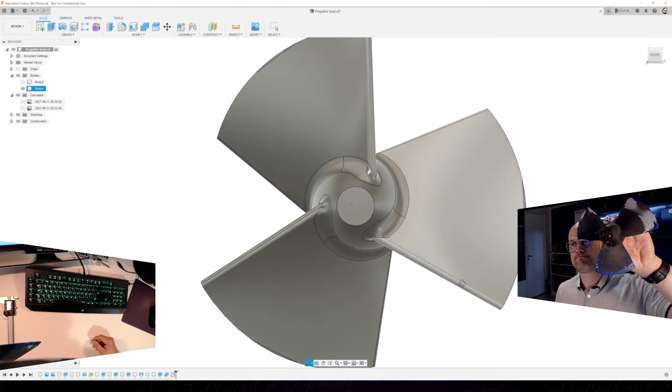I am going to show you something from this screenshot from last week's live stream. As you can see, the thing I was not very happy about is the fact that the fins went underneath each other, which they don't at all do on the original. So that was kind of a pain.

But since then, I actually tried to redo the loft function and made it look like this. Can we reach this one? Oh, if I did this. And now it actually looks like this. So now they have some room.

I don't know if it has any usable result when it gets into the water, but this is the piece as we left it last week. I would also like to be able to do these fin edges more sharp, because I think that would of course be better, that they would look like a real aeroplane blade.

But there's an issue with this. If we have to 3D print it, we have to make sure that there is actually enough material to make a layer that size. So to begin with, I'm trying to make it like this, where it has this rounded edge, and then we can always do some more tweaking and see if we can make the fins a bit more like real fins. But yeah, this is the propeller as it is right now.

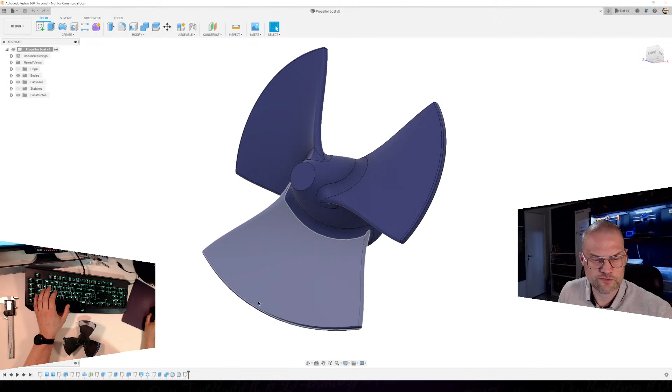I'm thinking we are going to go ahead and, well, we could try to have some fun with the loft function. It's actually not that bad of an idea to show you how it works. Remember, when you use Fusion, you can always go back to your timeline here in the bottom and find the function you wanna edit or completely remove. I only made one loft, so that's pretty easy.

This is the one. I'm gonna edit that, and it's gonna move the timeline back to where we were at that point. And we can do all kinds of crazy things with this fin. When we have finished doing stuff to this fin, we can just say OK, and it will reapply it to all three fins and do everything we told it to do afterwards. So we should be golden on that front.

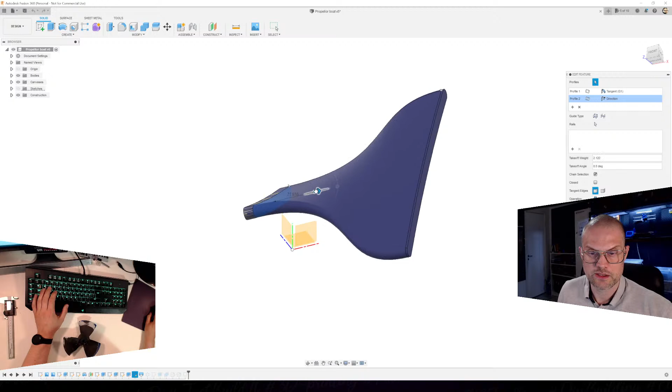There is two edges here I can move and do stuff with, and pull them in and out to my liking. This was actually the way I did the, the way I made it not go underneath each other.

Let's try just to say OK on this one, just for fun. Let's see if there's still room. And again, I don't know, I'm not an engineer, I don't know if it has any usable result either way, but I actually think this propeller looks pretty good.

So what I was thinking was that maybe we should try to just keep the fins here and go back and try to do the fins in a more, see if I can show you, a more, yeah, well, this is a real aeroplane kind of fin, but on both sides. And I'm not sure that it's gonna work like this, but we're gonna try this, that's for sure.

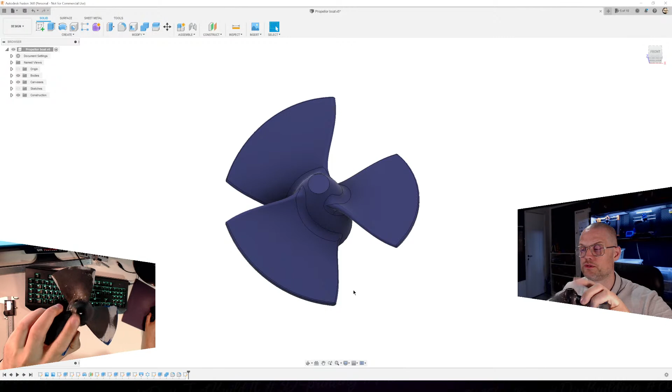Okay, so we need, obviously, I hope you can see this, we need a hole to secure it to the mounting rod, and we have our trusty calipers.

Just gonna see what size hole we need here. 12 millimeter, and there is a hole more in there in the bottom. Let's see if I can reach it, and it's about 6.

Okay, so first we are going to choose the face where we can do the drawing of the hole. I'm gonna make another sketch. I am going to press C for circle, and let's make this 12 millimeter.

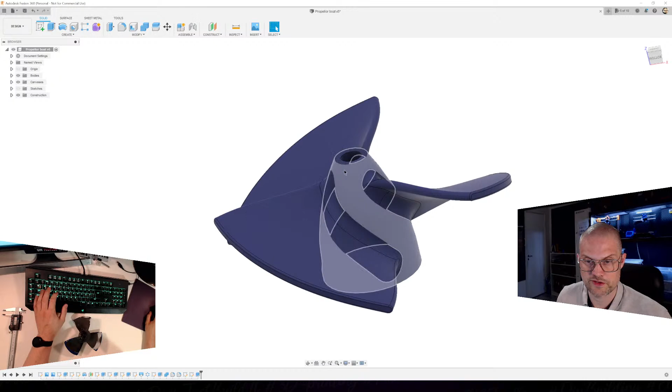Okay, I'm gonna highlight it, press E for extrude, and it's of course going to be going inside the propeller. Let's see, it's like this. It's also 12 millimeters inside, so minus 12. There you have it. We now have a new face down here we can draw on.

And of course we need again a hole, C for circle. The rod that we are mounting it on is 6 millimeters, and I know that when you 3D print you have to accommodate for some wiggle room. So I'm gonna make it 6.25.

That usually is enough. I'm going to again highlight the circle, E for extrude, and this time use not distance but to object, anchoring it to this bottom piece, so that if we make this piece longer, it will still make the whole way through.

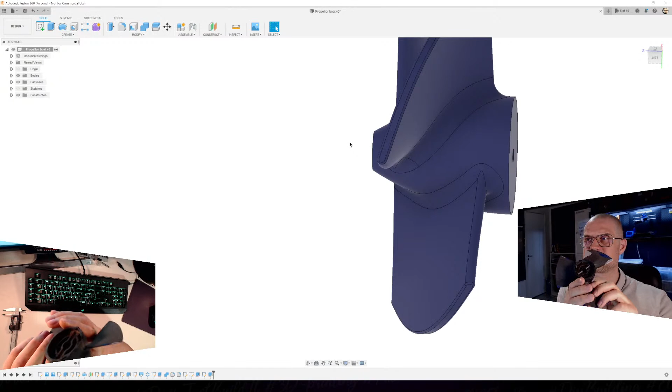Okay, so that was the first easy hole to make, and the propeller also has this. It has some weird kind of things inside it too, and this cross section, which I believe comes from what holds the propeller to the shaft, so that it will rotate and not just have the shaft rotate inside it.

So we are definitely needing to draw this piece right here in the middle. I am not a major fan of making all this in the middle - it saves plastic, but it's not always a good idea when you print stuff to not have a big fat surface to print on. So I think I'm gonna try to get around this by just making the cross section here and pulling it down enough so it will fit the same size as this.

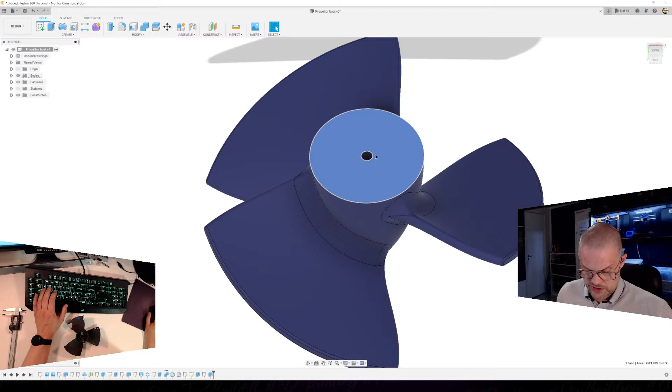So let's see, we can draw on this side again, and we need again to measure this piece right here - 48 millimeter.

Okay, now I need to make this a rectangle. I'll use my toolbox, S for toolbox, choose the center rectangle because I want it to go from the middle part right here. I know it's 48 millimeters wide, gonna make sure we can fit it, so we'll give it a little bit more. And the width is 5 millimeter. Okay, tab 5 millimeter, so this should be enough.

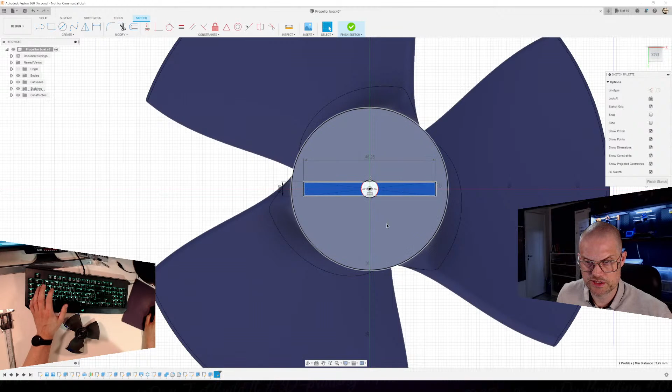So I'm gonna make sure that the hole is actually a lot bigger. I wonder if it has to be that all the way through. Perhaps we can make that - we can make that, I know we can. Let's just extrude these two pieces down to the size we need here.

Again, 12 millimeters, 12.4. E for extrude, minus 12.4, like that. We got this little thing made. And I realized, of course, that it's rounded in the bottom, but that's not a real issue because we can just make a fillet down in the bottom there.

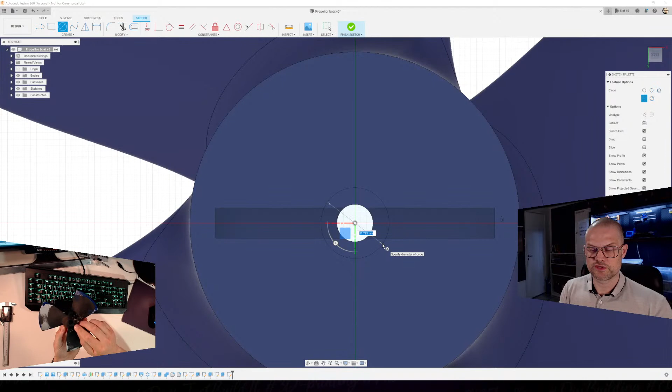But before I do that, I will actually like to make another sketch. I think I'm gonna make the hole here in the back bigger because it looks like it has the same size hole as it has in the front, and just kind of a spacing in the middle or some way down there. Let's see if it's 12 millimeter. It is. So we are going to make it 12.25. Let's do that. Okay.

We want, of course, to take everything here so we have the entire circle highlighted. E for extrude, and this is actually another fun part about this project - oh, sorry, this program. I am not absolutely sure how long there is to this part minus this spacing we need, but I can again do a to-object, go to this. It will of course remove everything.

Then I can go to offset and say - well, I'm not able to measure this piece right here with the caliper, but it looks like it's between 2 and 3 millimeters, closer to 2, I think. So my offset could be 2, and of course it's minus 2, and then we can say okay, and there we have it.

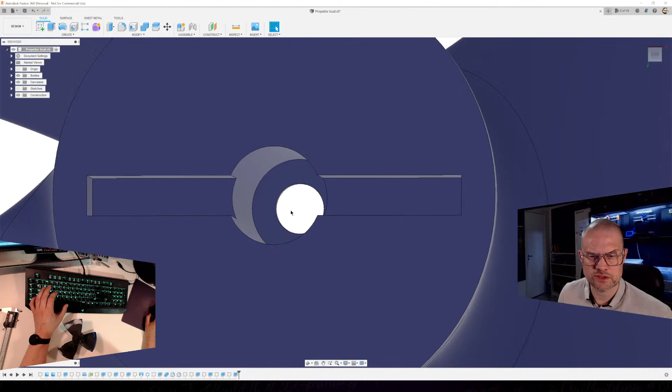Yeah, this is the way it's made. I haven't seen the rod we are going to mount this on. I don't think that originally this is not a good idea, but let's see.

Okay, I want to round these two pieces because they are rounded - I don't know if you can see that, but they are rounded here in the bottom. Let's see if I can get it to zoom in on this. I think I can. No. Work on some more lighting down here. But I am going to make it like if it was just rounded all the way. F for fillet, these two.

I remember that we made this rectangle 5 millimeters. That means that 2.5 should make it round exactly, which it also appears to be. Okay, there you go. We have a rounded piece right there.

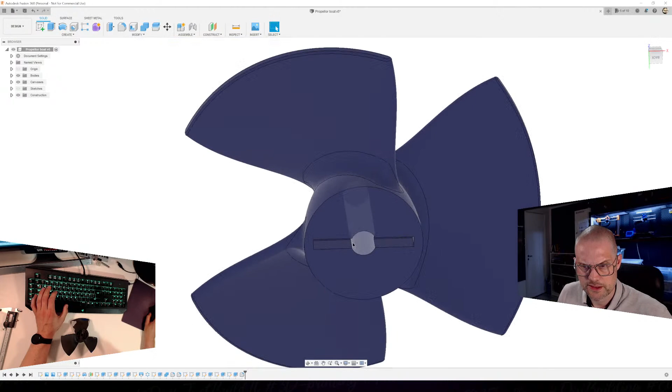Apart from the hole that goes in the side, the two sides of the propeller, that's actually pretty close to being finished with the first prototype of this bad boy. The holes are in the same direction as the cross section here, and I need to know where they are, and how to best draw this.

Of course, I'm not able to make a sketch on a rounded surface. That way I can't just go ahead and do sketch on this. I actually think, what would it do? It would just tell me to go ahead, pick a place to do it. You can't do it on a rounded surface, you know that. So let's just do like this.

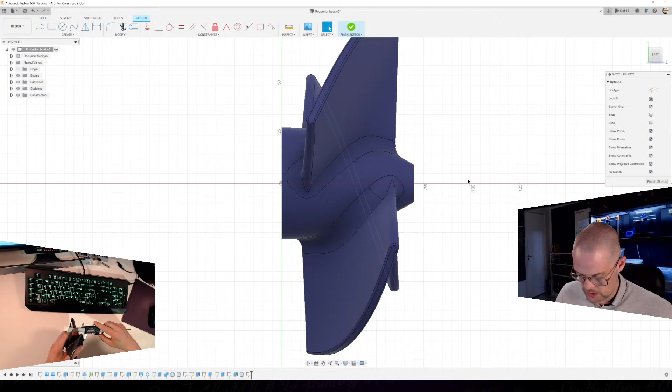Again, we do a little measuring. See if we can find the middle of this hole. 45.5. Oh, this also has a threading in there. Yeah, we're gonna make that with a tap later on.

Okay, let's remove the body to better be able to see. I'm gonna do a line, like a construction line. 45.5, like this, and a circle. I want this circle to be a real circle, not a construction line.

Let's again measure the hole. So this would appear to be a 4mm threaded hole. So if we want to thread this, we want to make sure that there is enough plastic to make a thread. So we are going to make it 3.75. It's my best guess.

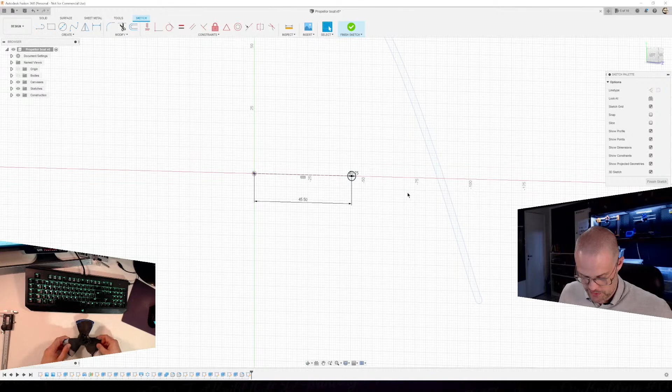The hole is going all the way through, which means that we can do another fun feature when we do an extrude of this. If I can get it, come on, yeah, there it is. Extrude, and I am just going to drag it out. Like that, going to drag it out like that.

Okay, but I want to go both ways, and if we look here, we can see that from the origin, the middle of the propeller, we have only gone one way out, and we are going to use, this time we will be using symmetric because it has to be symmetric.

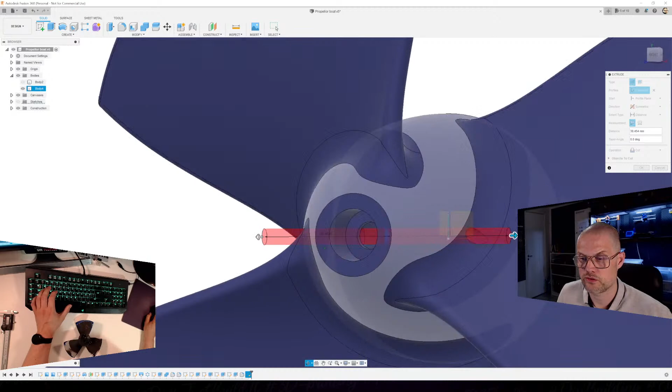Now we have just made another body, but we want to make this a tool to drill. So we're going to open this, and as you can see, everything goes red, which indicates that it's going to cut through the model itself. So let's just apply this. Okay, we have a hole in the middle there.

I wonder if I'm going to be having trouble with these holes later on. It shouldn't happen.

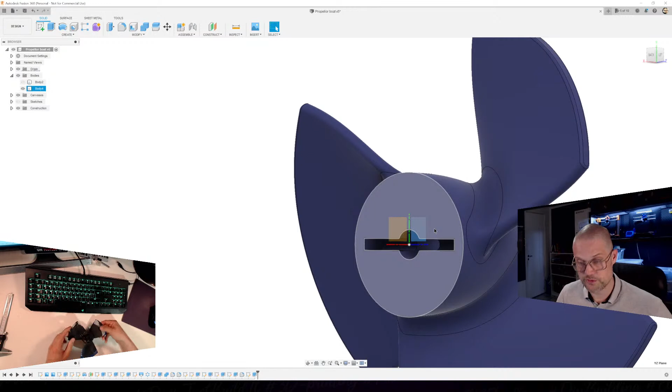We are going again to be making a sketch because they are kind of sunken down, to make the screws disappear in the holes, of course, and we need to insert them a bit. 4mm. Wow, the measurements really go again and again and again.

I am going to make a sketch on the middle part of the propeller again. This time I'm using Project. I'm going to choose this hole to get something to help me. Remove this, turn it left. And I didn't get the other way measurement. I'll make it 10mm. C for circle, which it doesn't allow me to do here. That's kind of odd.

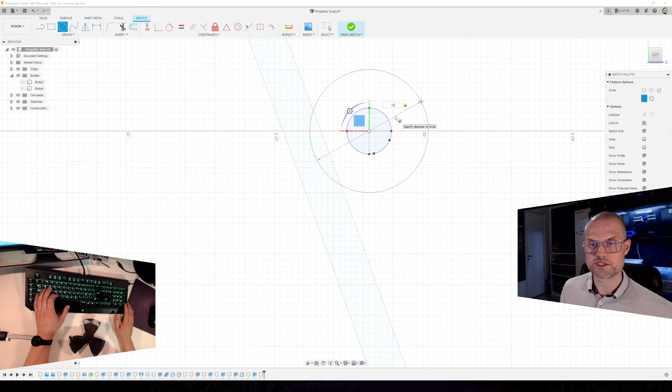Construction line. Construction. Oh, I was lucky there. 10mm like this. Okay.

But if I open my drawing and just take this out, I'm going to make the hole destroy the propeller. That's of course not the idea with this. So I am going to have it start not at profile plane but an offset, and again, I am going to guess this because I can't really get to figure out where this hole starts.

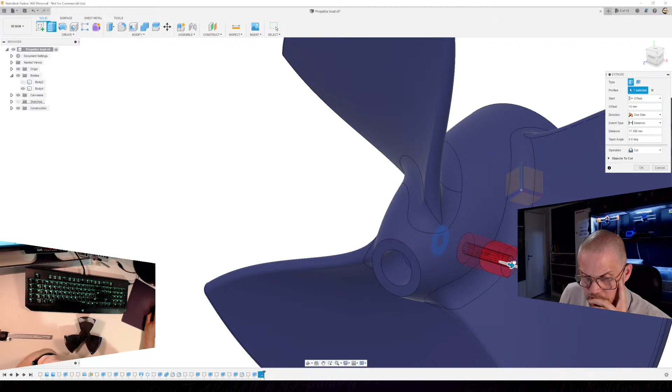So it's going to be a bit of a trial and error. Start by 10 mm. Yeah, 10. Okay, I'm definitely going to run into some troubles with the propeller, I think. Let's see if we can remove the propeller a bit.

We could perhaps do that. I guess the offset is, again, I'm going to choose symmetric because... I'm not going to use symmetric because apparently symmetric can't do the offset. And why can't it do that? That's weird. It has to do that 2 sides instead.

Okay, I'm going to make it all the way through, and okay. I'm not going to use 2 sides, I'm just going to use 1 side, and then I'm going to mirror the feature afterwards.

Really annoyed about this because there's really only one way to do this unless I start over with the fins. Let's see how bad it goes.

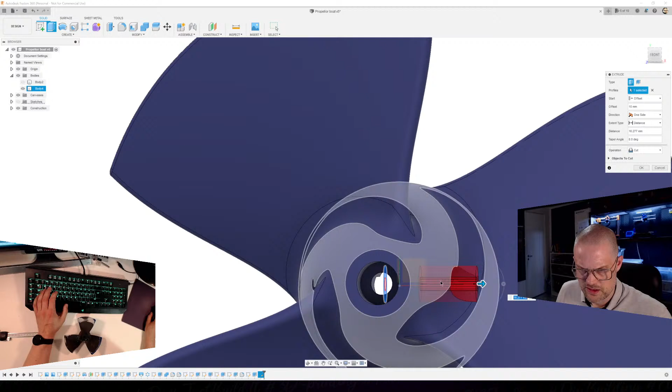Pull this one a bit. And the offset, 15 millimeter. Ooh, I think that's good. Okay, so we definitely got a hole there.

Now another fun feature, which I also use a lot to make things easier: mirror. Instead of mirroring a face, I'm going to mirror a feature. I just made a feature which was this extrude. I'm gonna highlight that, it asks me to select the plane. I'm going to select this plane, and hopefully it will do kind of the same thing here. It's not 100% certain because they don't look the same, but let's try and see what happens. Yeah, it worked, but it doesn't always work. This time it worked.

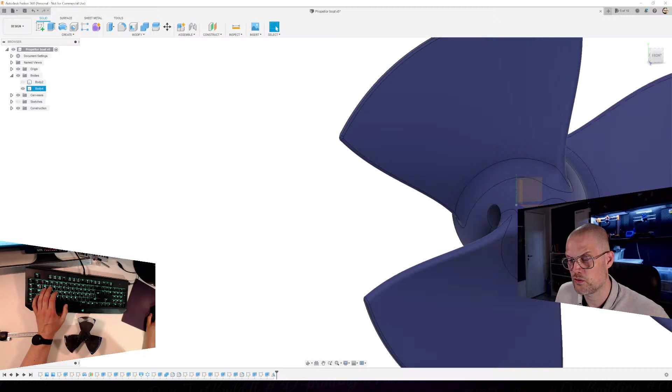Something tells me that I am able to make this crossbar sit in another direction if I need to, but I'm not sure that moving this that way and that hole the other way will make any help to us at all. So I'm gonna think about what I'm gonna do here, and how on earth did the fins get so different from the original, one could ask.

We are still running, yeah. It's gonna say I'm gonna run out of...

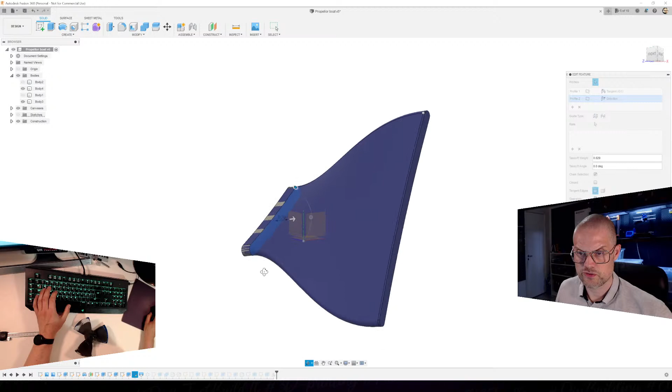Let's look at the loft one more time and see if we can do something funny with it. Need to remember that it is tangent and direction. But what if we do curvature? Oh, that was the one it didn't want. Make it. That looks like... okay, that's a crazy propeller.

And one of the holes in the last part we made actually went to, I'm not gonna say it, but that part of the hole doesn't work anymore, because now everything on this surface has changed. So yeah, let's move it back.

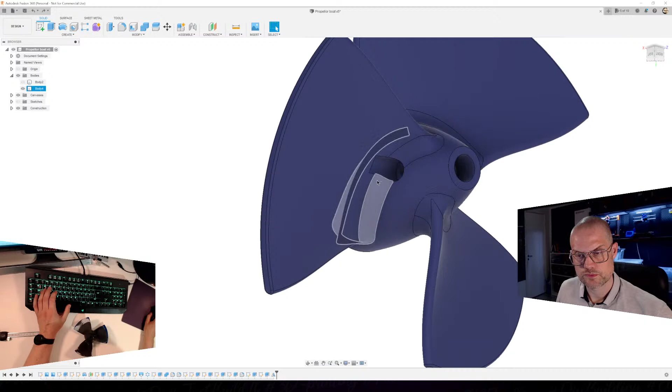I'm gonna regret to undo that, and if this even has any issues, but I guess the propeller has to be somewhat even weighted all over the place when it turns.

I am pretty sure that I need those holes no matter how I do this.

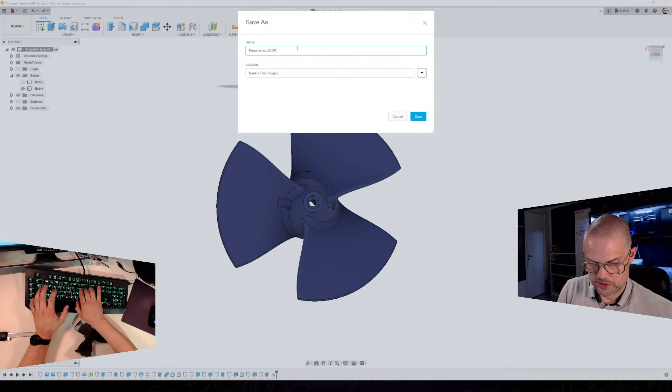Save this. I'm gonna make a copy of it. I'm trying to see if we can perhaps get a better... save as copy. Okay, now we hopefully have two of these, so we're not gonna destroy all the work we did. We have, okay.

I am going to actually go all the way back. Let's scroll through, scrolling back through the timeline to see what we did. Weird mouse today. And that's before we made fins and stuff like that.

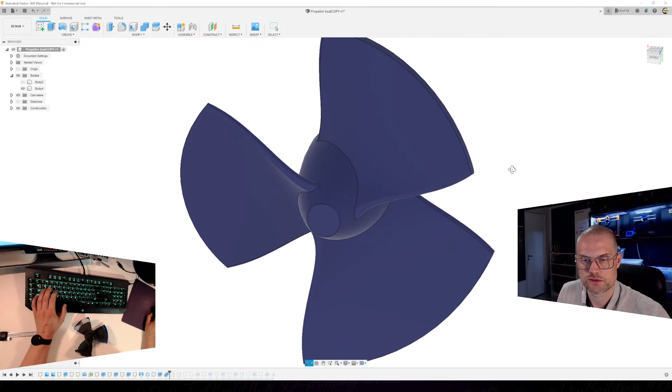Back to where I drew this, and reapply the canvas like this and see. Okay, this was the original canvas we were using to kind of draw up where we want our piece, our fin, to work from.

See if we can move this a bit. Oops. Why? Move it, let's turn it a bit like that.

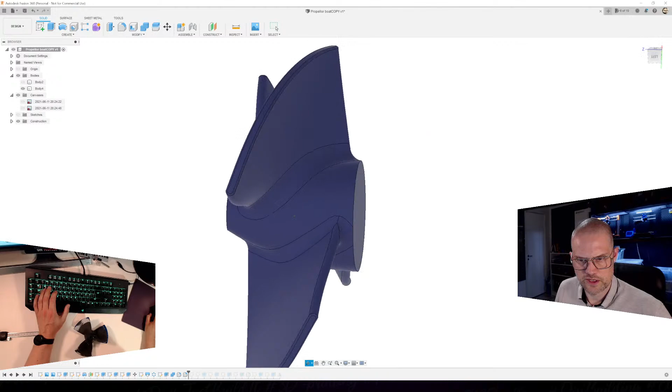And something happened, but well, something really good actually happened, because we just got ourselves some room to try to rotate.

I'm not entirely sure this will work, but let's try it for the fun of it. I want that marked out, I want that highlighted, and this, and this, and this, and everything that should be rotated.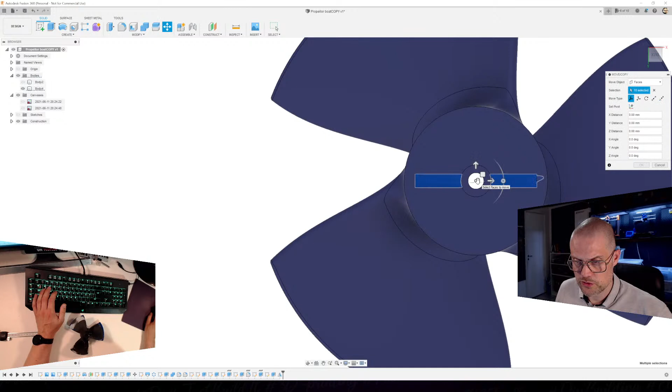M for move. I of course need to be sure that its origin is in the middle. And again, I'm not absolutely sure that this will work, but let's try.

Oh, it's not liking it at all. It wants to go the way I don't want it to go, which is kind of a pain. I am pretty sure if I do like this and like this, I can go ahead and do this thing. But can we then see what we want, where we want it to go? That's the problem, right?

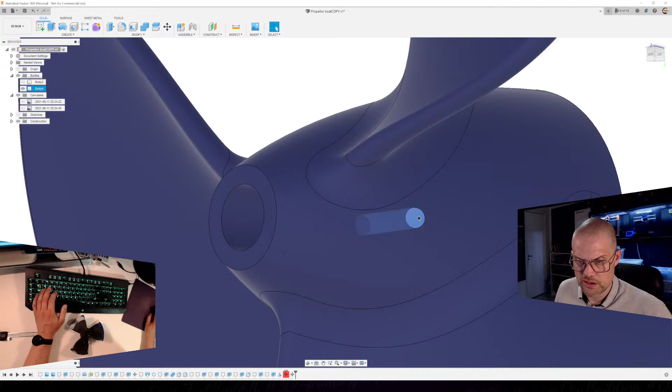See, we want to make sure that we don't interfere like that, perhaps. And now we can simply highlight the hole, press delete, another powerful feature. Delete, yes. And we will simply just align the hole with the new crossbar section here.

Let's see. If I use our original origin now, we will not be in the correct angle. If that's not a problem, just saying that sometimes you need to think about these things.

I'm going into my construction menu and I'm going to find something called a midplane. You will be using this a lot. I'm going to make me a plane to draw on in the middle, but perpendicular to the new crossbar section.

And we are then, to highlight the new plane we made, I'm gonna do a sketch on it, and we need to make the holes again, but this time I think we are going to be better off not interfering with the fins.

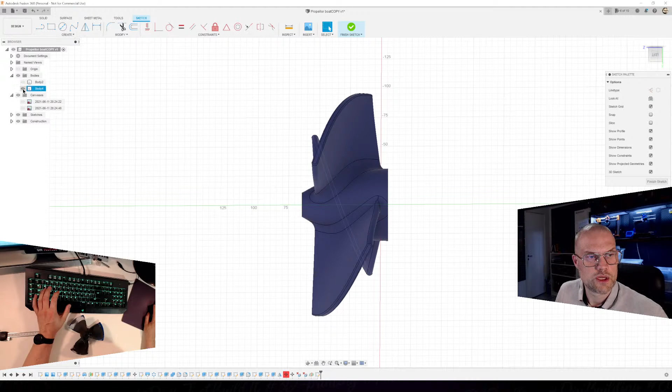So let's try to turn off the body, make a line, construction line from - no, that's not the bottom of the piece, is it? No, it's not. I'm going to do a project of the bottom of this right here. Yeah, oh yeah, that's finish sketch, because I need to reapply the sketch, edit sketch, so that it is perpendicular to me.

And body off, construction line, farthest away. And if I remember correctly, it was 45.5. Yes, it was.

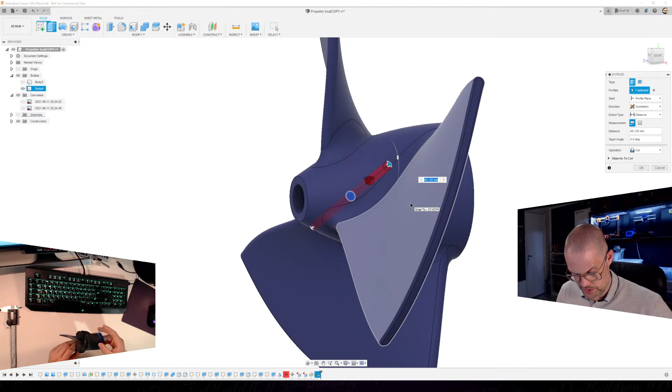It's still not ideal, but it's not ideal on this either, I think. Oh, it's kind of the same now. Let's keep it like this. Okay, now I have something down here it doesn't like. Compute failed. Okay, what if I delete it? Nothing bad comes from that, right? Nope, it's okay.

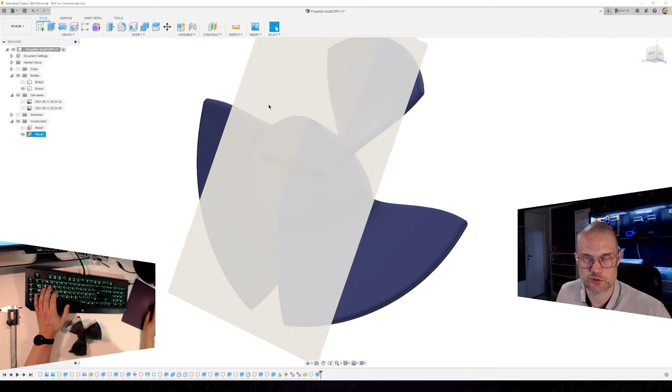I just made a plane that way in the right orientation, which makes it unnecessary to make another one, because on big designs you can have like hundreds of these planes, and then when you have to use one of them, you are going to scroll down and down, unless you are one of the crazy people who always rename your planes as soon as they are made. I'm sure someone does that, not me.

Okay, let's draw a sketch. We already have something we could use as a projection. The holes we are going to make bigger, like this. And since I don't have the right angle, and it's not like I can do like this, because we have kind of made that option not very friendly for us anymore, we are going to say finish sketch, and as soon as we've done that, we are going to edit the sketch, which will then center it for us. Again, we have a circle tool, which again, of course, doesn't want to work here, I think.

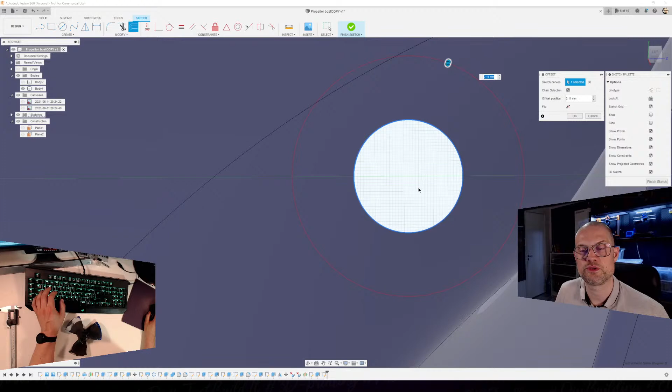Nope. I could use the offset tool, but to be honest, it's too late for me to start doing math about how much more I need to do. So I'm gonna try to see if I can make another one. It has to be somewhere in the middle. Well, it doesn't want to do that. It's really weird.

See if we can do it like this. This is pure luck if this helps. It's close enough. 10mm, as I recall, yeah, 10, 5.

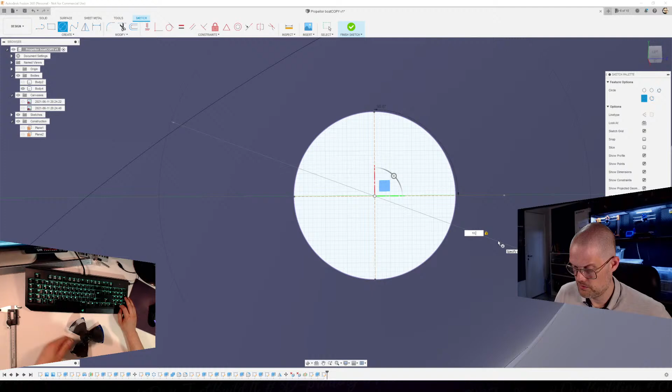We have made this circle inside this part right here. And again, we want it to have an offset before it starts, so it doesn't destroy the inner part of the fins. Like this. E for an extrude.

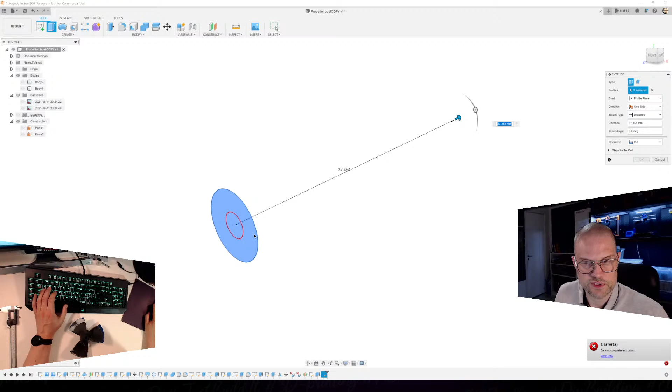And we want it to go all the way. Cannot complete extrusion. Why? Something about that red part in the middle, I think. Does this sometimes. Delete that part. Extrude this one. Much better. Much better. Okay.

Well, obviously we don't want that big of a hole all the way through. Again, we are going to do some very good guessing. Offset, let's just call it 15, I believe was correct before. Still looks good. Yeah, it's not so bad.

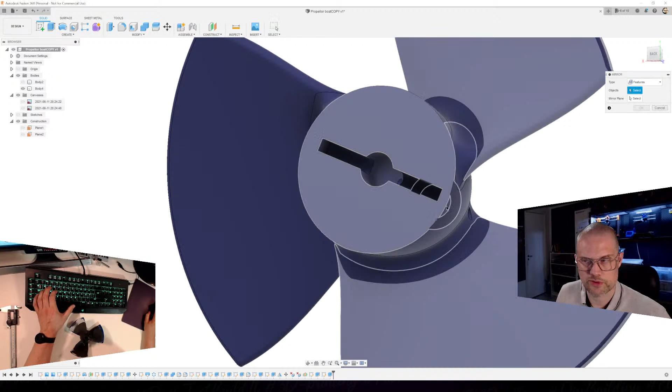Now we should be able to do the mirror feature function. So let's try to do that. Mirror feature, the last known extrusion we made, and we want to do it on our plane from before, of course, this one. And it kind of does a bit of an outline there. I'm not entirely sure it's going to work, but well, there you have it. It worked.

And let's just see if we can do something about this. This doesn't have to be a problem.

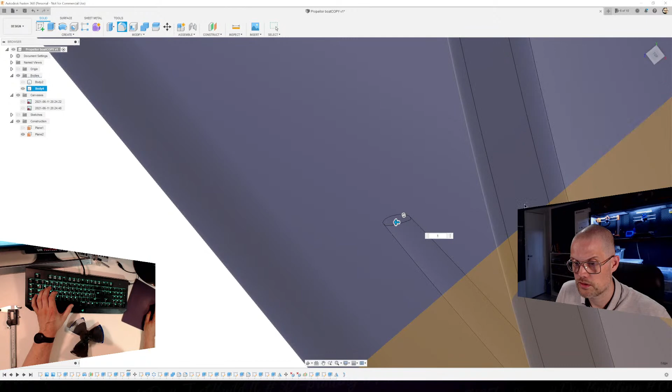Now, do some more fillets there. Fillet. Go, go, go, go. Yeah. Okay. That. And really want to make one on this one also.

I can hear my graphic card roaring up. There was a problem, don't say. If you run into problems with fillets, sometimes just trying a smaller number will help you a lot. Usually it's not a lot smaller you need to do it. 1.5 would be also, yes.

And we want a fillet in here to make it stronger. Now this part right here is the part where you go through your model, and if you try to design something and 3D print it, you will eventually learn where you have to make your model stronger. And a fillet from time to time, or a lot of times, works immensely good on that.

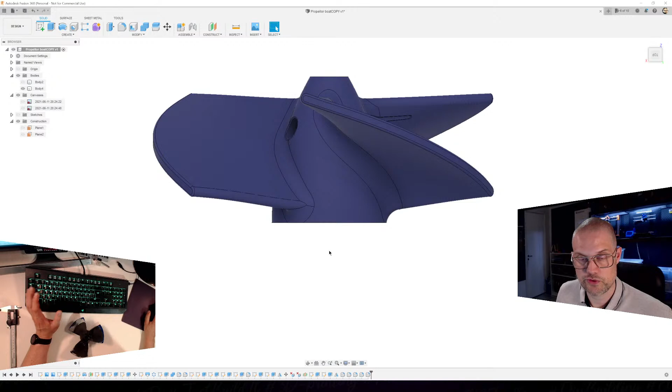Okay, I have one thing to tell you about this piece right here. If I am going to print this like this, I would be best off printing it from this side against the bed, and I could of course just rely on my slicer to do the support material for these fins.

But I think that I would be perhaps better off if I did some kind of cool break-off support right here in the sketch, in the drawing. I'm gonna try to do that. Just gonna make sure that we have everything important on the model. Yeah, it would seem so. So

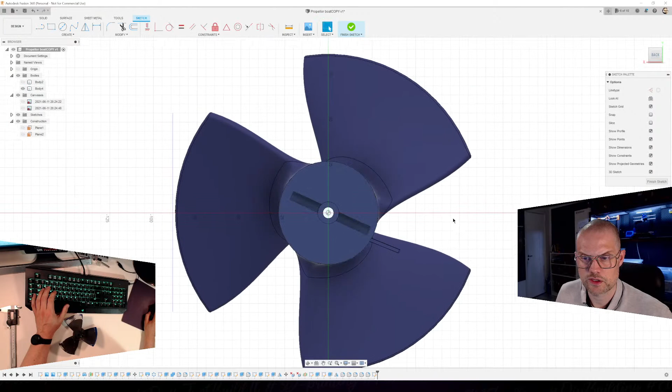Take from this side. Now I am not able to project. Yeah, I am. Okay, that's weird. This one. Yeah. This one. Wow. Okay. Now I actually have something to help us. Okay.

And we need to make an offset of this. 4 millimeters, I guess, and the other way, -4mm. Let's do that with just the one, and right, I'm just gonna make one. I'm gonna use this amazing tool called, yeah, what is it called? Pattern, of course, right? Circular pattern.

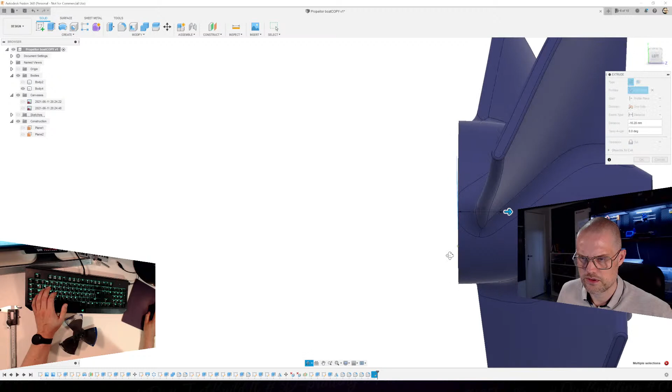Now, let's see. Make this like go all the way up. I'll make a new body, please. I'll make a bed for it to land on, like that. But if you do that, it's gonna be fused together. No, it's not, because we're gonna do another cool feature right after we make this.

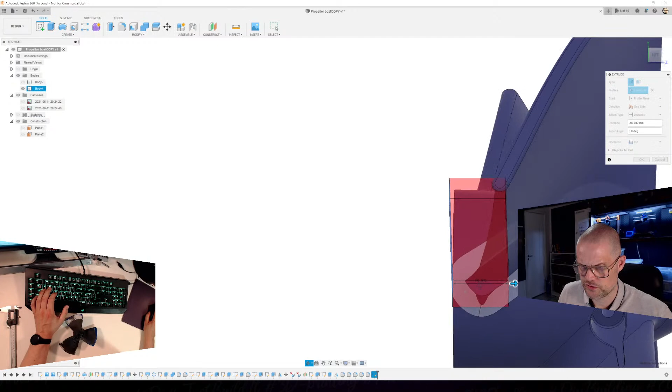What the? Yeah, and there. Okay. Extrude, and I'm gonna make a new body, and I want it to go to this part right here. Now, if I don't tell it to do a new body, it will automatically think that I want to cut out this piece. So I'm gonna make a new body like this and say okay.

That way I have not fused anything together yet. And now I am going to use this, our propeller, as a tool to remove whatever is inside this piece of support material, he said, hoping that it would work.

I'm going to use the combine tool. My target is where I want the thing to be cut out of, which is my support material. And my tool is, of course, my propeller. And I don't want it to join, I want it to cut. But if I do this, it will cut and remove the propeller. I, of course, want to keep my tools when it's done, like that.

If I now remove the propeller, you will see that it has a fine part of the propeller inside this piece right here. To save on some filament, I can make a fillet here, like this. That's really just for fun.

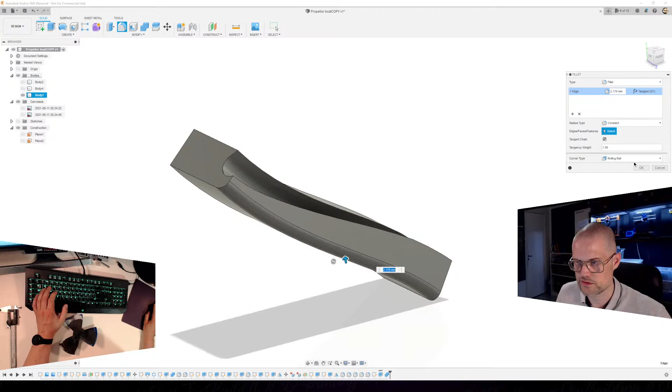And a very, very powerful tool is the tool called offset face, which I also use a lot. You will get to know it if you try to make like, let me see if I have one, if you try to make stuff like 3D printed threads and stuff like that. If you do them and not offset the faces, you won't be able to move anything. They would just be stuck in most cases.

So I am going to offset this face. Again, I'm going to use S, and oh, great. I'm just gonna highlight all these again. Give me a minute. Like that. S, offset, and it's right there, offset face.

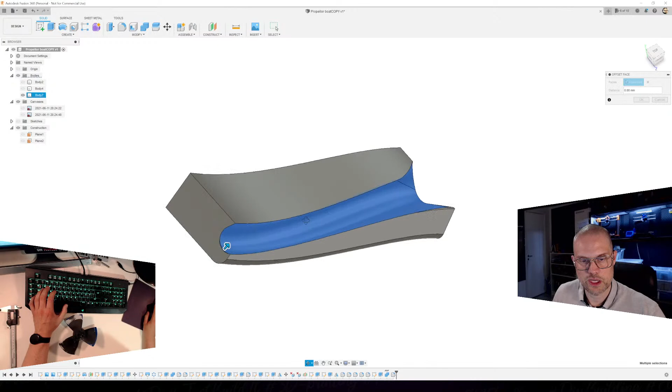Now, I just want to make sure that when I print this, it doesn't fuse together, which again can be trial and error. My guess would be 0.4, and of course I want it to go minus, I want it to go away from the part. Like that. It cannot be, okay, 2 perhaps.

Wow, that's annoying. 1. It can do a 1. 1.5. 7.5. We are negotiating now, the machinery. Okay, let's just say that we can live with that.

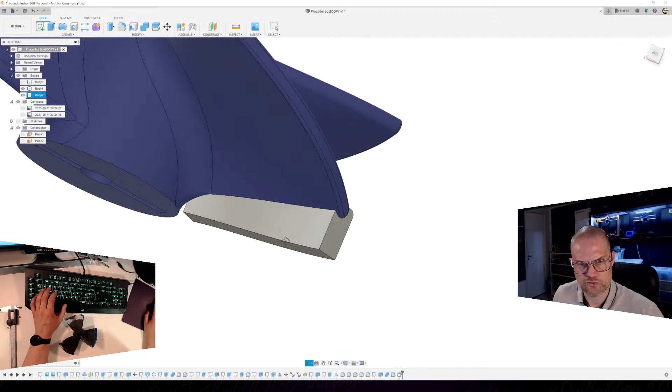There is also the possibility to simply remove a bit more later on. But for now, let's try to make this work and try to put it in the slicer and see what happens when we try to make a 3D printing file for this.

But before that, I honestly don't need this to be that big. Let me just take this one and say offset face minus 0.15 again, like that. Okay, perhaps the thing I did wrong there was trying to have it calculate too many faces, instead of just having one face calculated, and it pulls the other with it. That could be the issue.

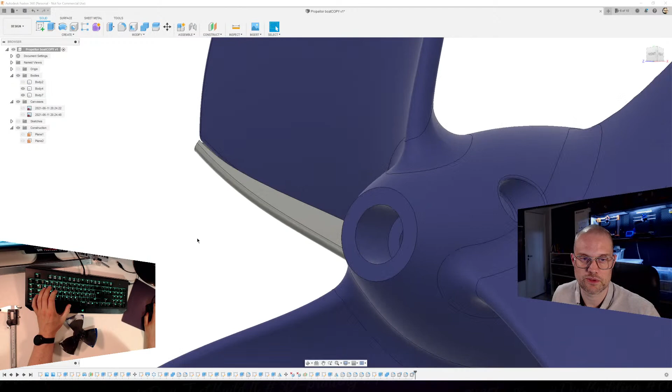Now another tool I want to show you is called Inspection, which has great ways to see if your different bodies and components are touching each other. And in case you don't want that, you need to do something about it.

I'm trying the interference tool right now. Let's choose two bodies here. I've selected two, as you can see. I'm going to do a compute, and it's going to tell me there are no interference detected, because we made the offset face to account for any differences in that area.

We're also able to do an inspection tool called section analysis, and section analysis also needs a plane to start on. So if we do like this, we can see a cross section of the propeller. What I want to see right now is to make sure that, if I hadn't done the interference check, my piece right here wasn't interfering.

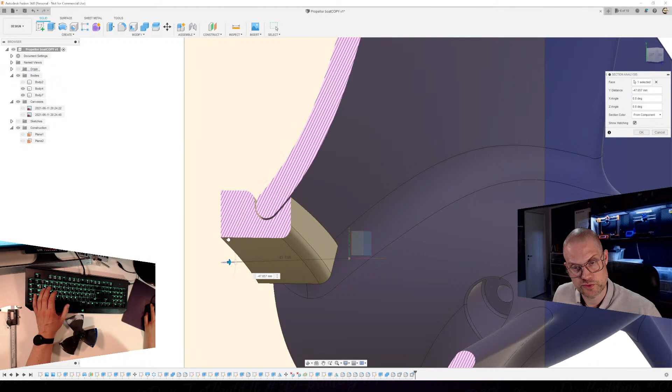Printing wise, I've already found a stupid thing we need to remove, because this is the top of the propeller, this triangle right here. It won't be useful at all to print something on top of this, it won't support anything. So we're going to remove that once we confirm it floats nicely along the edge without ever touching. It's like magic.

Wow. Okay, but the other thing is you can save these section analyses and view or unview bodies and components, but I usually just turn them off when I don't need them anymore, or just don't accept them as pieces. So this triangle is the part on top right here.

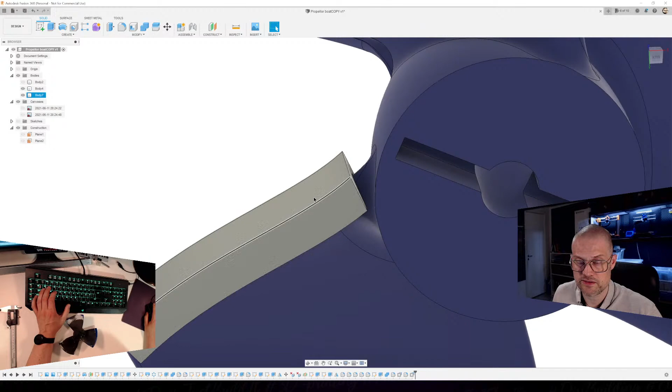There are a lot of ways we could remove this. I'm thinking something like a cut down the middle. I really want this base to be as big as possible to make sure it has good adhesion to the bed. We could try to make a fillet on this and see what it does. But then again, I really want the bottom part to be as one, so that doesn't help either. Let's not do that.

Let's just do the old kind of cut. I'm going to do a sketch, and I want something up there to be gone. Let's see, let's just make a line like there to there.

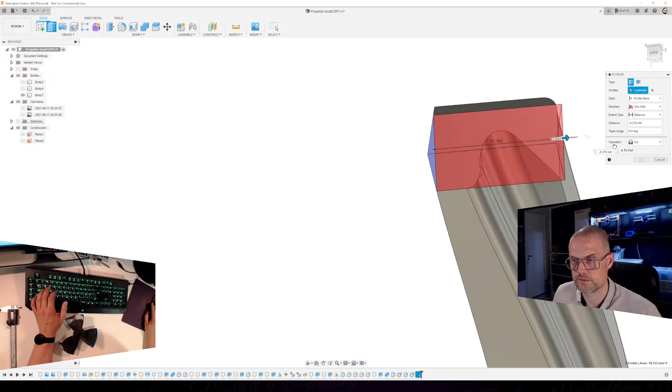Let's go back, because that was stupid. I'm just going to make a line somewhere there and there, and I want this triangle gone like that. But I don't really mind the fact that it's there in the bottom.

So let's again do an offset. Here we could actually also use an object and say we want it to start here, like that. That was... that was the other way around. Okay.

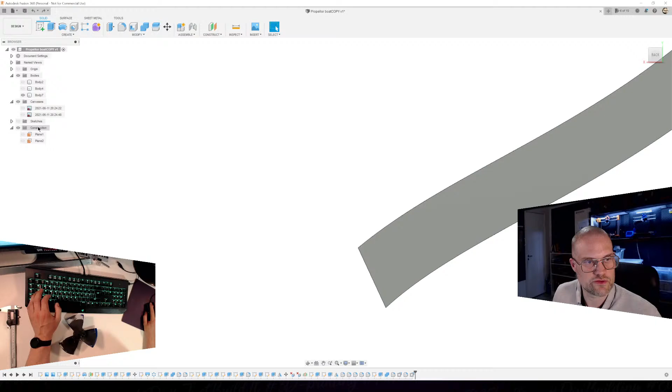Why is it not visible? Great, great, great. I'll go back to my sketches again. I'm able to see them.

Now that I look at this, I think there's an even easier way to do this. I can actually just move this, and whenever you have a face selected, you can always select where you want it to pivot from. If you go over here to the move copy tool, choose set pivot and choose where you want it to have a new origin from. Once you've set it, you need to go back and apply it.

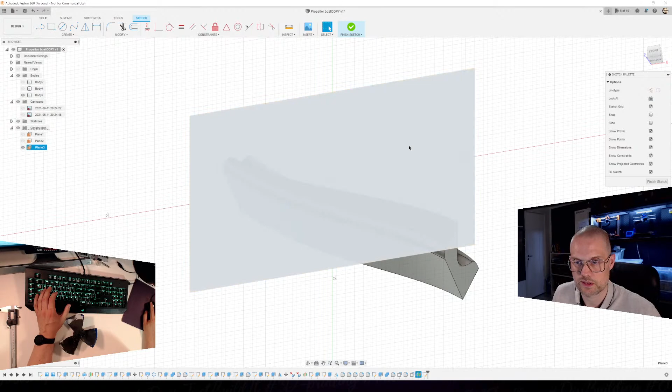Now we have three planes, and actually it's only a little sketch we're working on. Did I get it like that? Sketch, yeah, project this, yes. Okay, we want a line. Let's go.

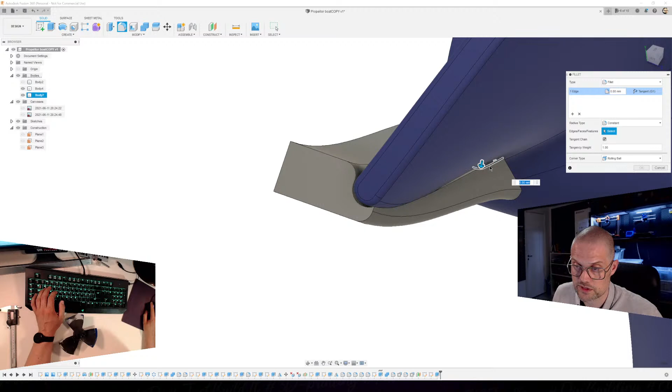Okay, now if I look at my body here from the top, I have this, but it's still not very usable, because again we are going to make something go inside the propeller, which doesn't make any sense.

So let's go back, and instead of doing this line right here, we're going to make another one all the way down here. And we're going to extrude, and this time I'm going to do the fast way. I'm just going to move it like this, and I can actually just choose this one and let it go a bit further down like that. Mind you, this is just a piece to be thrown out afterwards, so it's just to help us.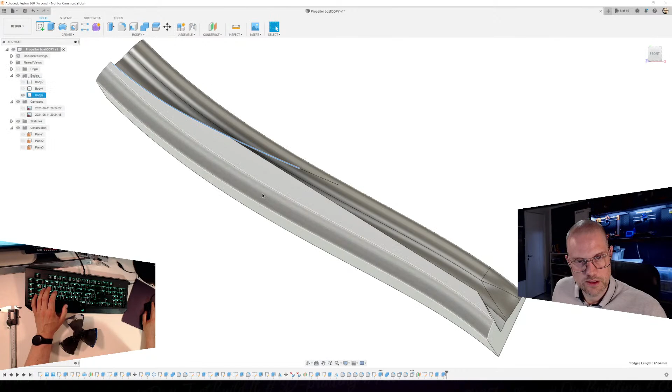I hate when that happens. Some little bit of the body is still attached to... just do it the correct way.

Make an offset of this, like this. Okay, I'll make an offset of this like this. Okay, thank you.

Is there anything in there? Nope. Not gonna work either, because I need to make sure that this one is tied off, and this one.

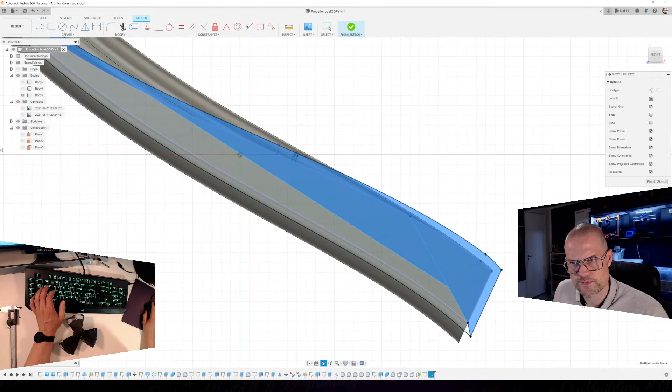Let's remove everything here. Highlight what I want to be gone. E for extrude, pull it down. See it cut.

The lines are on, it's just this a bit further down, without destroying the bottom of course. Great, it's almost art we are making here.

Okay, so this is the support material. I'm just gonna keep it this satin steel color so we can see the difference.

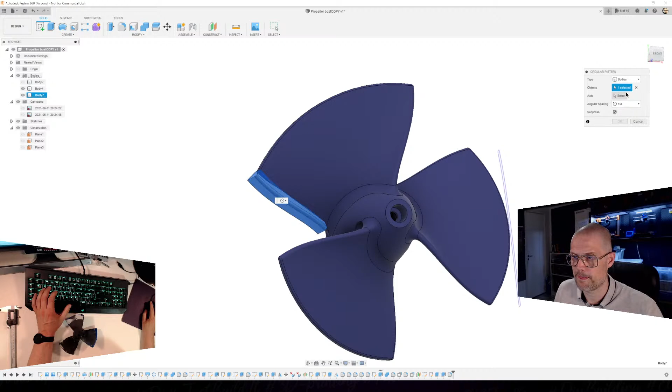Now we of course want 3 of these, and we are going to go to create, and we need a pattern, and this time of course we need a circular pattern, like when we made the fins. The object is a body, and the body is this one. The axis is of course the center axis, and that's what we are going to find right here.

And by default it always makes 3. And if we make it like this, look at that - we just made our own support material.

That might even work. We are not gonna not have support material, because in here we are going to have support material, of course, because that angle - just turn it a bit like that - that angle right there is too much for your 3D printer, unless you print it on an SLS printer or something like that, which would not be a bad idea actually.

The only problem is I don't know anyone who has one or can help me in that department, but perhaps someday - I'm only 3 live streams in, so perhaps someday I will actually eventually own an SLS printer. That would be cool, a mess, really a mess, but really cool also.

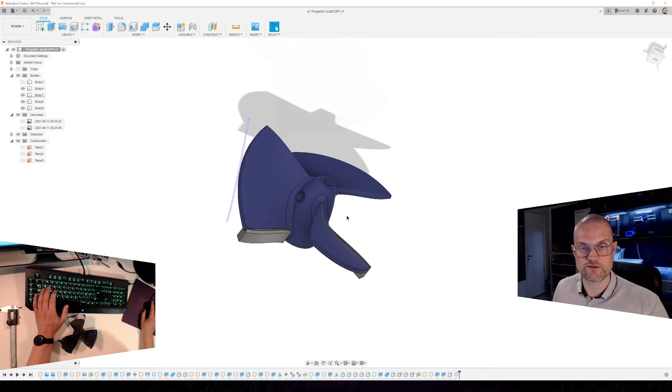Now I am going to hopefully be able to make an STL file out of this. And when I say hopefully, I mean that my Fusion program has actually been in a habit of dying on me the last couple of weeks when I tried to do that.

Okay, I am just quickly going to go back to before I made the pattern, because I can see that we still have something that goes like in over the propeller, which is not necessary at all. So let's see if we can - actually, perhaps we should use a chamfer.

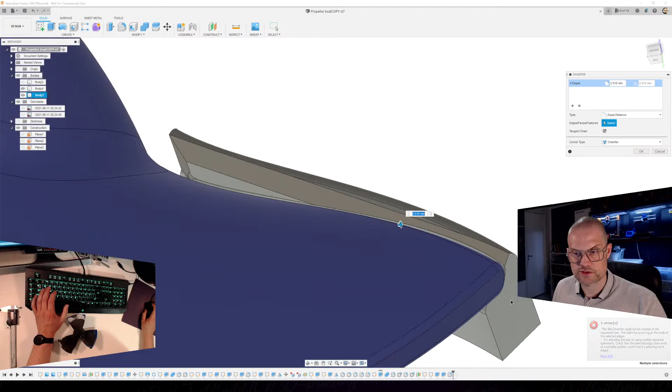There it is. You will actually notice that sometimes when you have trouble using chamfers, fillets, in my opinion, is the most easy option. And on this part in particular it doesn't really matter, because it's just support material.

So like that, and we are going to again save our propeller boat, and let's just - we have... no, we don't, but let's just do like this again. And now we have 3 support materials, which is 4 bodies in total.

We could of course make these into components, but I don't see the need for that right now, as long as I'm able to make an STL file. I'm going to make an STL file of everything, so that I'm sure I will also have an STL that has the support material.

So on top of this tree over here, save as STL. Let's see what it does. So far so good, it makes a mesh of the propeller. Looks pretty cool.

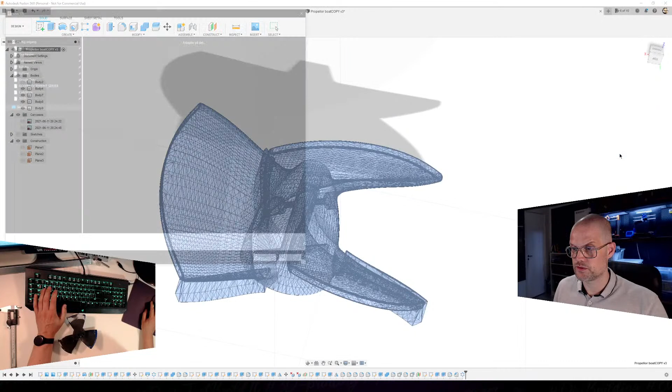Yeah, I'm just gonna say okay to that, and let's just put it on the desktop. Like that. And it didn't break at all.

So yeah, let's just get to our desktop, and this is the one. It's a big model, okay.

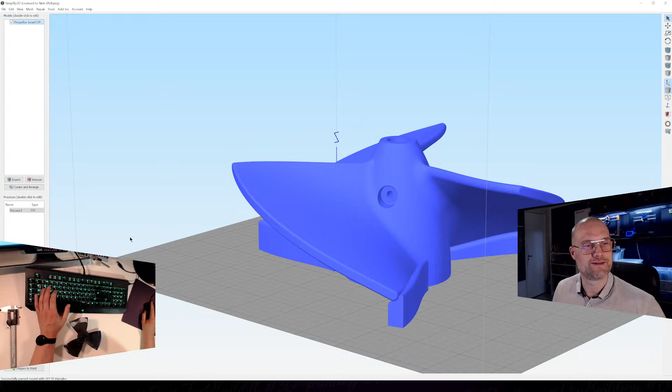So this is the STL file inside Simplify3D, my slicer of choice, mostly because I bought and paid for it. But no, I think it's actually a good slicer.

Let me make sure my process settings are right. We are of course going to do a prototype in PLA first, just to make sure the measurements are okay. Later we'll either do it in ASA, perhaps ABS, though I'm not sure that'll work, or some kind of freakishly strong nylon. But for starters, we're just making a fast prototype.

Layer height 0.4 - that's going to be a low resolution print. Let's just set layer height 0.4. Okay, prepare to print.

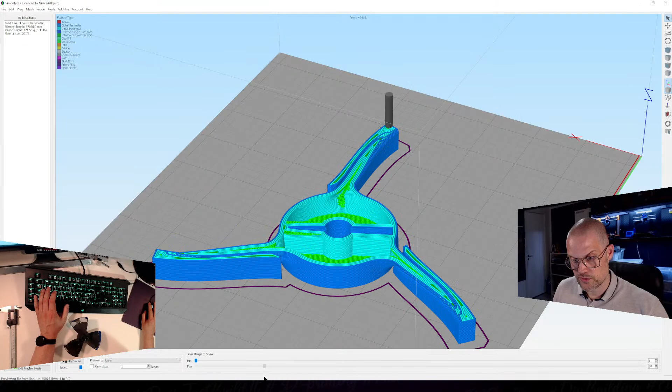It doesn't have support added right now, but what I really want to see is that my support material doesn't fuse together with the propeller. Let's go down - as you can see, we also need some infill. Let's make sure, because a 0.4 nozzle is actually kind of a 0.6 nozzle, it's a big nozzle. This could give some drooping with these long lines going out and in again, but I'm pretty sure this propeller won't be used before having some kind of finish anyway.

3 hours and 16 minutes, which I guess will be more like 3 hours and 40 minutes - it's not that accurate unfortunately. But this is our propeller, how it looks in the slicer.

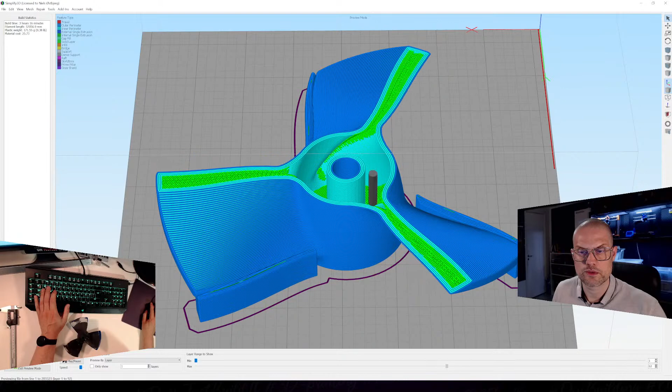I think we're definitely going to need some support material, and we also need infill, because infill helps us with the inside holes there.

Let's just do a 20% infill, and let's say we want our support pillar to be 3.5 max overhang angle. I'd say anywhere from 45 to 60 should be okay - the lower the number, the more support material, or the less angle it will try to hang over. 45, generate, there we go.

Now I believe we're going to be closer to 5 hours of print. I'm just guessing.

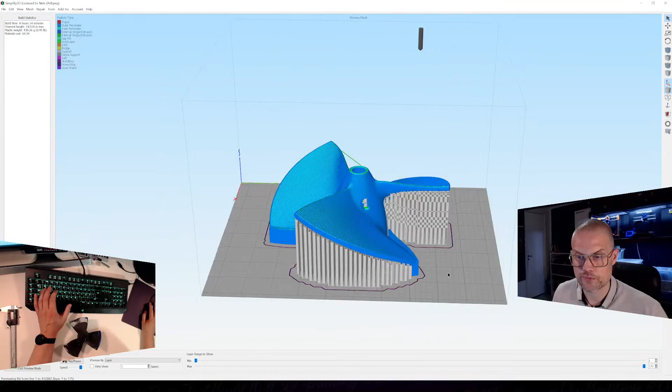So I'm gonna have - oh well, that was not correct. 8 hours of print. Wow. 8 hours of print.

Eight hours of print with a very, very low quality resolution, which makes me think ahead - if we want to do this in high resolution, it would be like 20 hours per propeller, I guess, which I'm pretty sure won't be great payment-wise, given the amount of time and the possibility of a print failing halfway. Too much risk there.

So we need to think a bit outside the box with this one. First thing we can do - our infill is what it is, but our support material doesn't have to be 35 percent, it could be just 20. The support base layer, I like that because it gives extra stability. Let's try and see if we change something there.

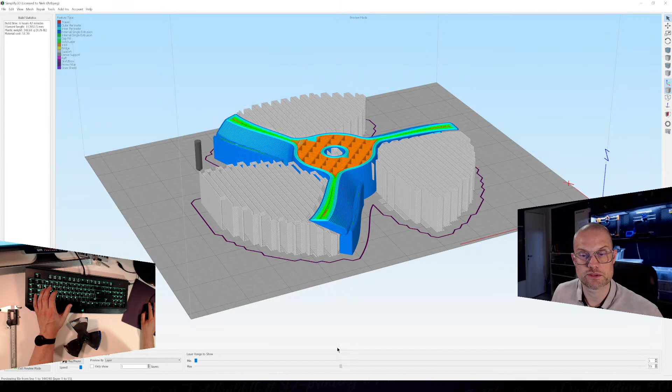I really don't think these homemade support pillars are that expensive print-wise, so I don't think we'd gain that much by just removing them and letting the original stand, but of course we can try. It's actually pretty simple. Other than that, I think it might work. It might work.

Obviously, I'm not going to start this print and just have you hanging here on the live stream - that would be pretty stupid.

And I can see we're an hour and 15 minutes into the live stream, so I'm actually thinking this is what we're going to do today.